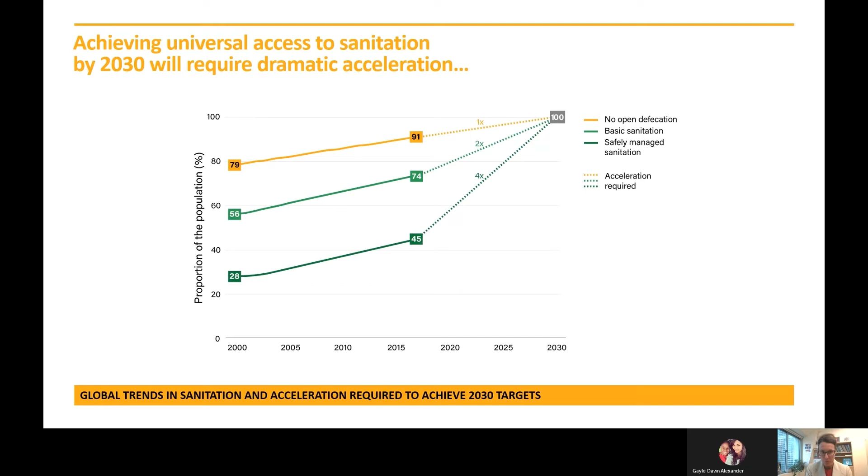Achieving universal access to sanitation by 2030, part of SDG 6 Target 6.2, will require dramatic acceleration in the current rates of progress. Based on current trends, to achieve universal access to at least a basic level of sanitation by 2030, global rates of progress would need to double. Achieving universal access to safely managed sanitation by 2030 would require quadrupling the current global rate of progress.

In response to this global challenge, UNICEF is shifting its sanitation program to support the acceleration required for safely managed sanitation. As we move from working on construction of toilets to working on the full sanitation chain, this has implications not only for the technologies we use, but also the need to establish a supportive sanitation sector enabling environment. This includes policies, institutional and regulatory frameworks, necessary data and evidence, capacity building, financing, and innovation. We need this enabling environment to ensure that services are safe, available, and affordable.

Our ambition is to accelerate global progress on safely managed sanitation services without losing the gains that we've made on ending open defecation.

The 5 key accelerators identified under the United Nations SDG 6 Global Acceleration Framework are improvements in governance, financing, capacity development, data and information, and innovation. These 5 key accelerators can be a pathway towards countries' achievement of safe sanitation for all, with the coordinated support of the multilateral UN system, the World Bank, and partners, including the private sector.

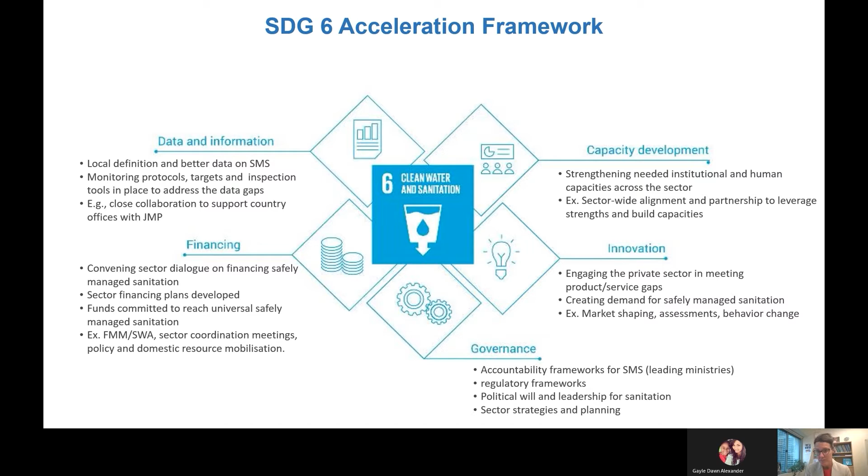Now looking at these accelerators one by one, I'd like to start first with governance. Good governance begins with leadership, effective coordination, and regulation.

Safe sanitation can be delivered effectively through a mix of approaches and systems tailored to the local context. Lastly, governments also have a critical role to play in regulating the sector. Well-balanced regulation is key to ensuring effective risk management while still enabling an innovative sector.

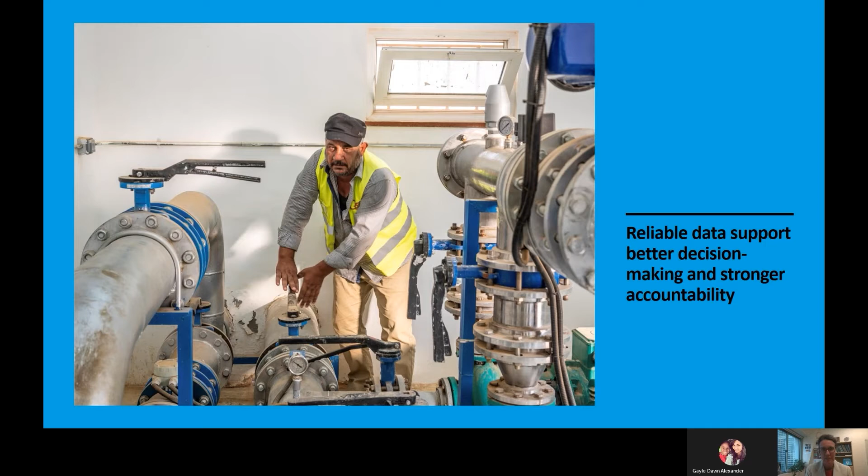Lastly, the final accelerator is to scale up innovative practices and technologies. We've heard and said many times, business as usual is no longer an option if we are going to achieve the transformative progress needed to meet Sustainable Development Goal 6.

Achieving universal access to safe sanitation requires innovative solutions and increased private sector engagement. Innovation can also help us protect the sanitation workforce, giving them safer and more dignified jobs. Innovative technology and approaches can help limit workers' occupational exposure and provide a healthier workplace. Measures such as phasing out manual emptying and replacing it with motorized systems can improve worker health and efficiency. Also, having appropriate personal protective equipment, standard operating procedures, and regular health checks can improve worker health and safety, not only for the workers but also for their families, while supporting continuity of services.

In the trends we can see in the East Asia and Pacific region, increasing urbanization and migration to urban environments call for new ways of meeting the needs of high-density populations, often living in poverty or in informal settlements. To date, most urban sanitation interventions have relied on the expansion of centralized sewer infrastructure that rarely reaches low-income communities and is ill-suited to dense urban slums and unplanned settlements where much of the urbanization takes place. Recognizing the urban sanitation crisis, its disproportionate burden on the urban poor, and the limited progress of prevailing approaches, there is a need for a radical shift in our approach to reaching these communities.

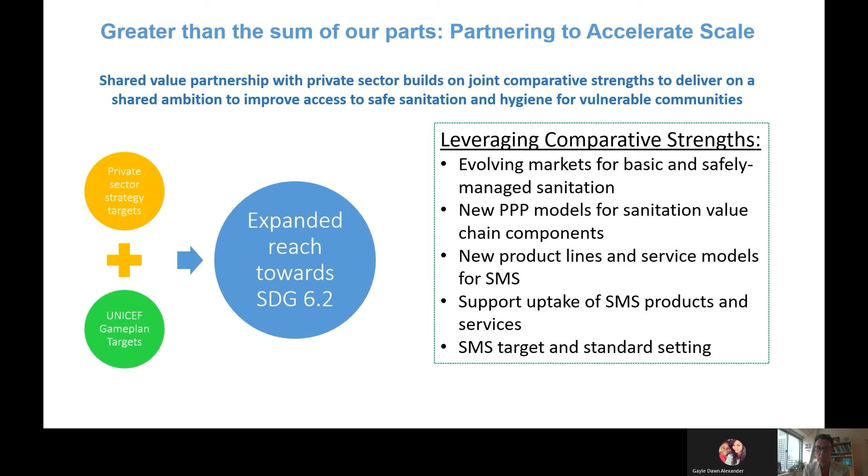We also support the uptake of safely managed sanitation products and services to help develop targets and standard setting, so that we can reach new levels of coverage of these services, meeting international standards.

As part of UNICEF's COVID-19 response, we have increased our engagement with the private sector, not only in the area of sanitation, but also in promoting hand hygiene for all.

Many of you may already be familiar with this initiative, launched together with the World Health Organization at the onset of the pandemic, to tackle the challenge of reaching 3 billion people who don't have access to hand washing at home with water and soap.

This has been an effort of many partners to try to close these gaps, with massive attention given by governments and the whole community to understand the need for enhanced innovations, supply chains, and government leadership. This is part of the front line of pandemic preparedness.

Over the past year, we've seen it move from an emergency response to become a central public policy issue, and it has also elicited new forms of private sector engagement and partnership, for example on platforms like the World Economic Forum's COVID Action Platform. We are seeing greater attention than ever before.

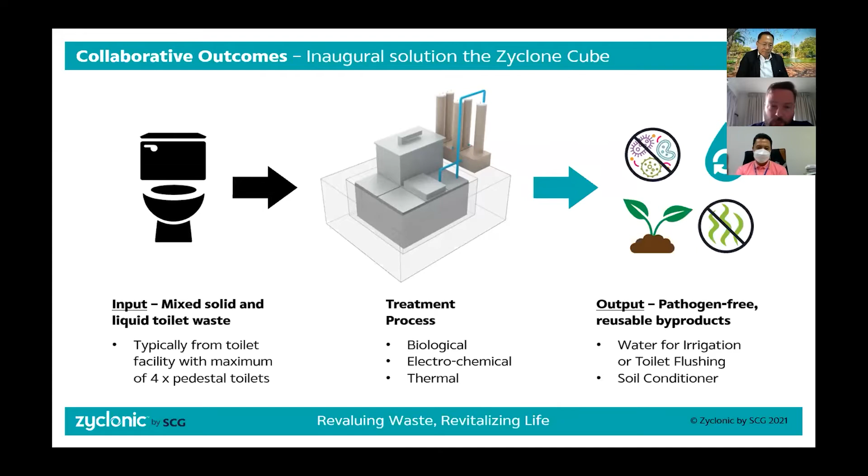So we gave the toilets to the community with the treatment technology, and the community gained also by using those clean byproducts to put it straight onto their land, into their allotments where they can grow fresh vegetables and produce, which they can later on sell or consume themselves.

Also part of that project, again with the Gates Foundation challenge, was to make it off-grid. So we added solar panels to power some of the technology, and also added rain collection roofing to collect water to top up the system with clean water.

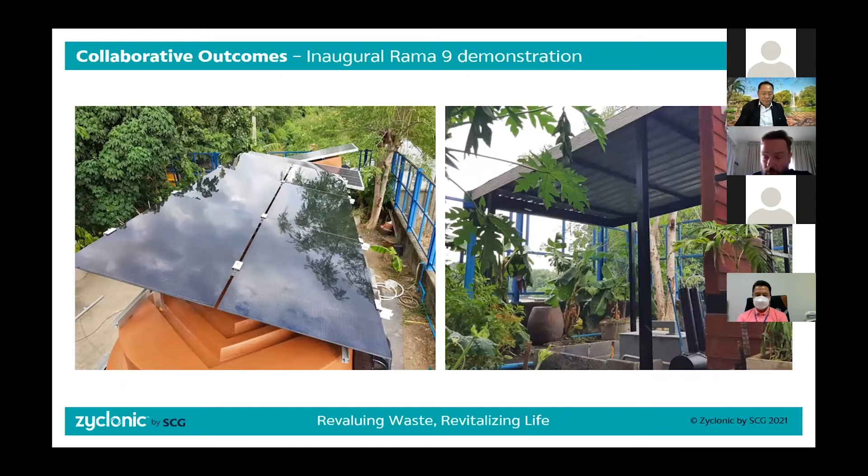Then in 2019, we won a Social Innovation Award for this project, a Thai Social Innovation Award. And also in 2018, SCG's project was one of the ones highlighted by the Gates Foundation at the expo in Beijing in 2018.

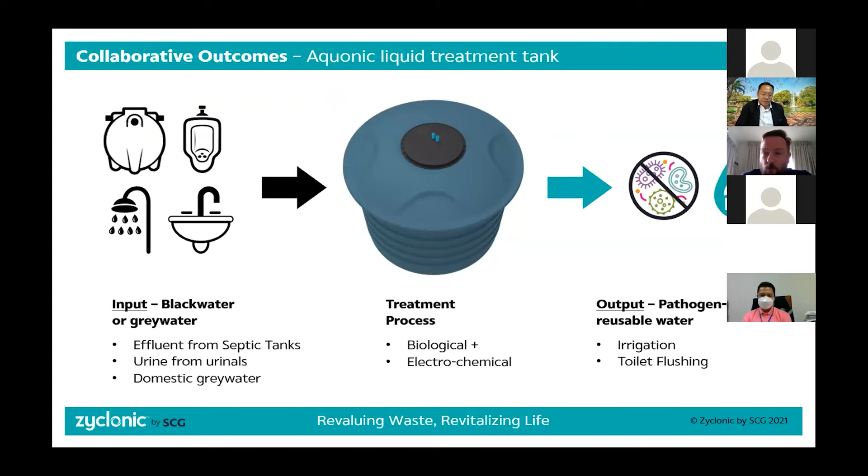Then another real outcome of our collaboration with AIT was our liquid treatment tank. This just treats liquid, no solid treatment. Essentially, we can take black water, grey water, effluent from septic tanks or urine from urinals, treat the effluent in our Aquonic tank, and turn it into clean, pathogen-free water for irrigation and toilet flushing. I'm just going to show you a little video.

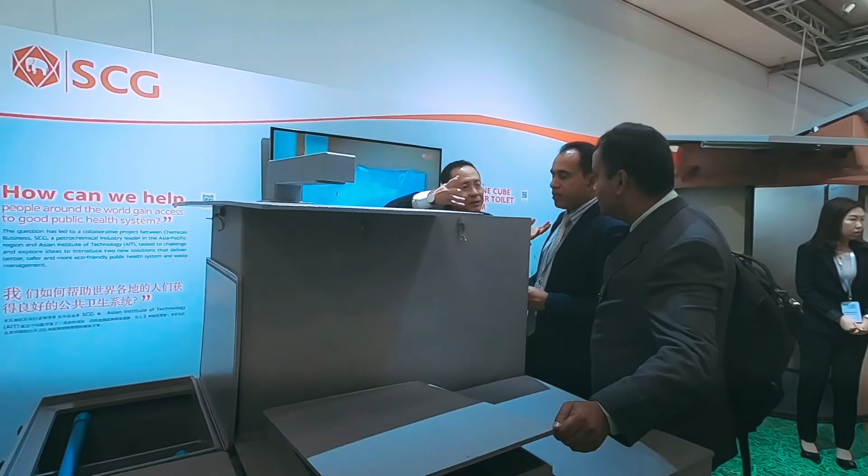There are many places in the world where clean and safe sanitation solutions are still not available, causing human distress and environmental damage. But today, no matter how remote the location, everyone can access better toilets with Zyclonic by SCG Total Sanitation Solutions. Zyclonic by SCG was one of 4 pioneering sanitation enterprises featured at the Beijing Reinvented Toilet Expo in 2018. Zyclonic by SCG currently offers easy-to-install front-end solutions and 2 back-end waste treatment systems which kill pathogens and output harmless, reusable byproducts. The Zyclone Cube is designed to treat both solid and liquid human waste direct from a toilet facility.

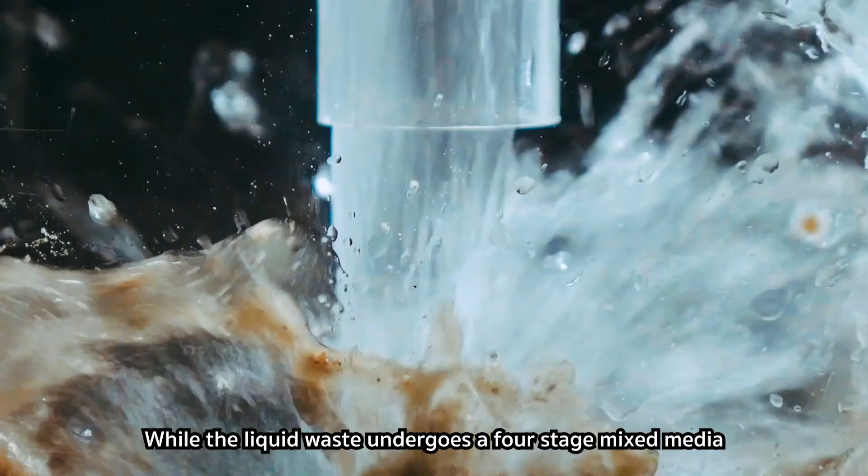After flushing a toilet, human waste will enter the Zyclone Cube via the Zyclone separator, which instantly separates the waste into its solid and liquid components. The solid waste is dried and treated with thermal disinfection at 120 degrees Celsius, transforming it into a pathogen-free soil conditioner, which can be directly used on the land to enrich the growth of local vegetation, while the liquid waste undergoes a 4-stage mixed media biological treatment process and electrochemical disinfection, turning dirty water into pathogen-free reusable water for irrigation or recirculating within the toilet system.

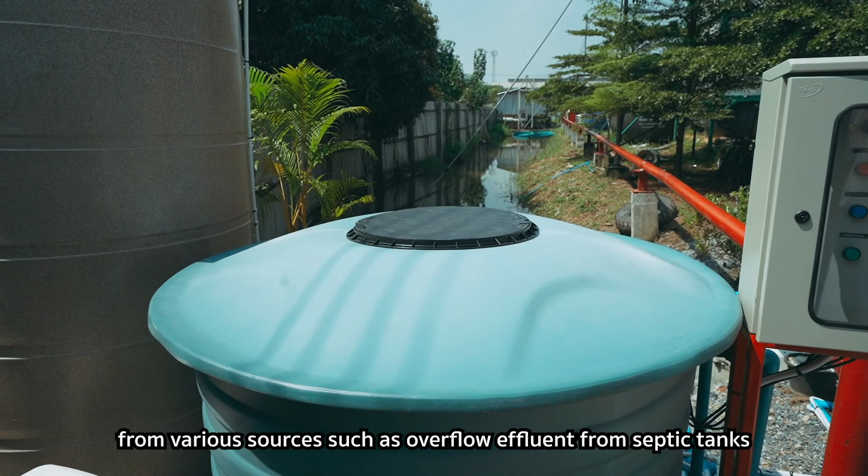Zyclonic by SCG also offers the liquid treatment tank, which recovers and treats grey water from various sources, such as overflow effluent from septic tanks, urine from urinals, or grey water from showers, sinks, or kitchens. The grey water goes through the same biological and electrochemical treatment process as used in the Zyclone Cube, and the treated pathogen-free water can be stored in a water tank to be reused for irrigation or as toilet flushing water. The liquid treatment tank is a compact, localized solution which can be easily retrofitted to existing facilities, producing 100% reusable water. It is an ideal solution for areas prone to drought and water scarcity.

Zyclonic by SCG is one of the sustainable waste solutions offered by chemicals business SCG to provide a better environment and well-being for everyone.

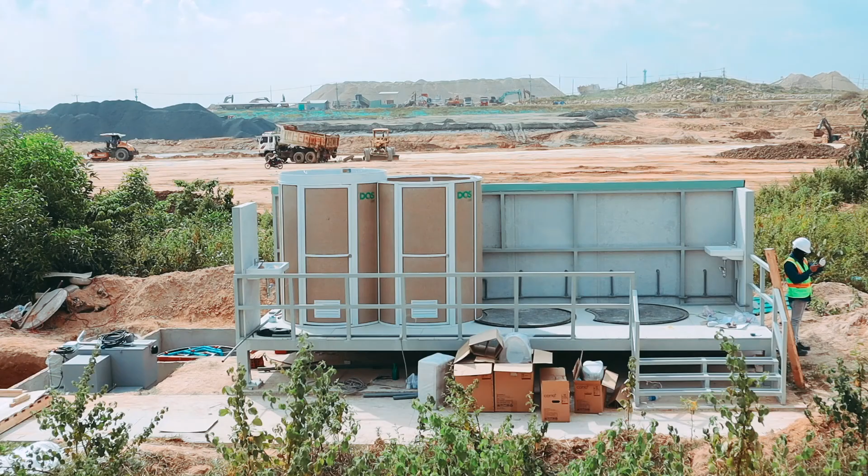Okay, I hope everyone heard that okay. So I'm going to talk a little bit deeper into some of the technology that you've just seen. Essentially we have 4 technologies that are independent.

So we have the waste separation, we have the liquid treatment, the solid treatment, and the odor elimination. But we can combine those together in various different formats to basically create solutions for very different scenarios.

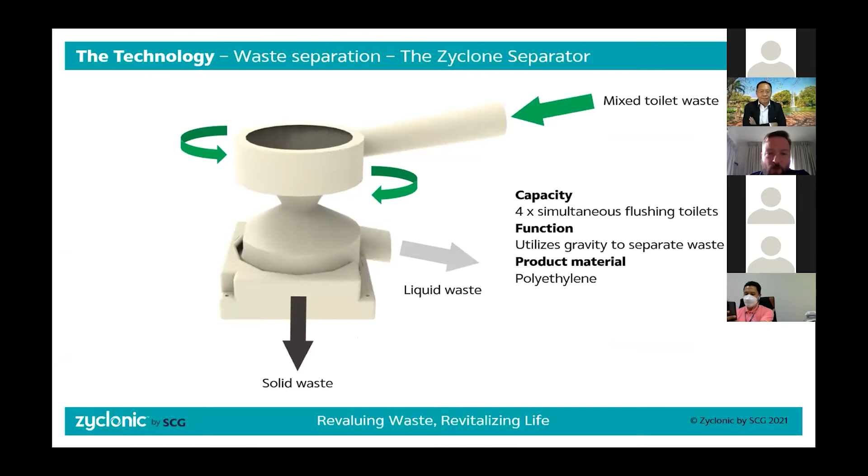So I'll talk about the waste separation, what we call the Zyclone separator. This is a device that doesn't use any motors, electrical supply or anything. It just relies on gravity to separate the liquid and the solid. So the solid drops down the bottom while the liquid sticks to the conical shape of the device.

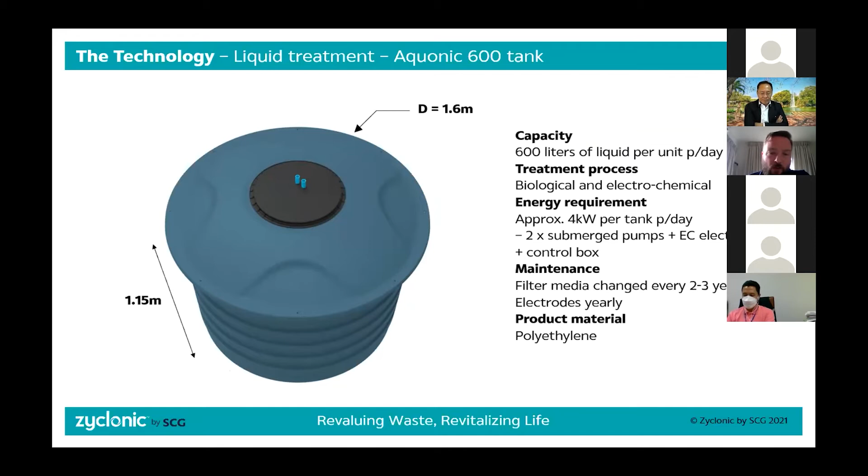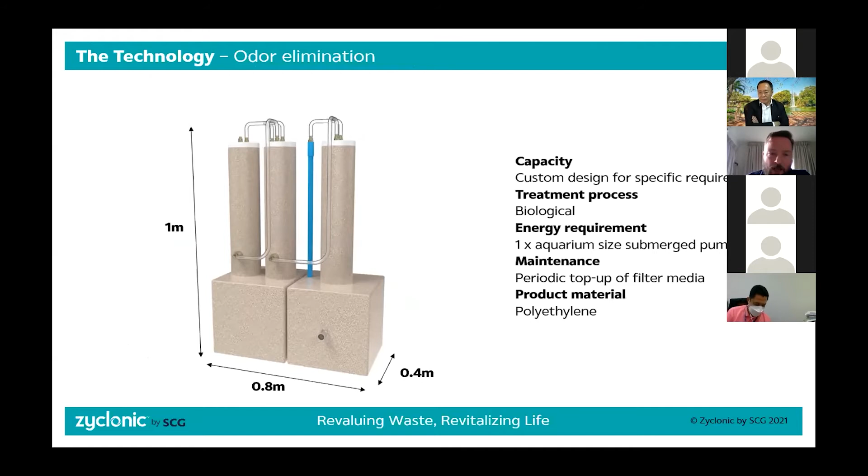And then we have our odor elimination device, which we call our bioscrubber. There's no chemicals used in this device, and it only has a small fish tank type pump inside, and essentially it's used to get rid of any smells generated from treating your solid waste. So any volatile organic compounds or odors pass through the towers, and inside the towers there's a biofilm which essentially eats and removes the smell from the vapor.

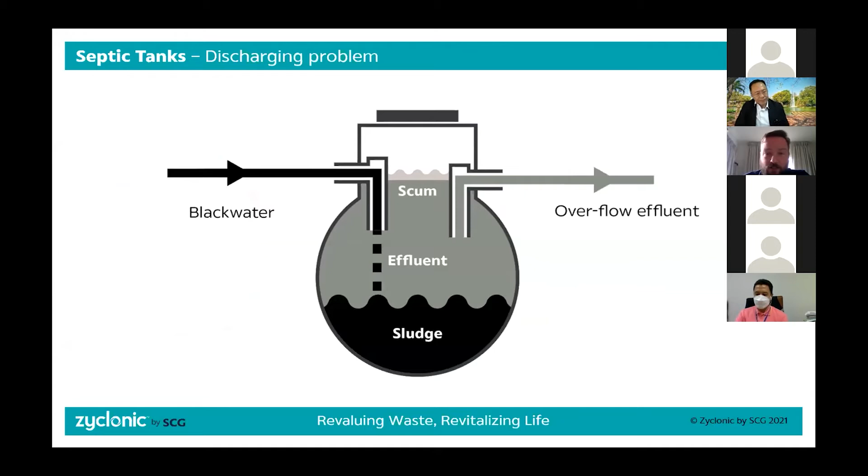So when we're implementing our liquid waste treatment technology, as discussed, septic tanks are widely used in Thailand because they are cheap to manufacture and easy to install. But a problem is that your overflow effluent, when they fill up, this can be released without treatment, so it's still dirty. This is obviously not great for the environment, for canals and waterways, because your dirty effluent is going directly to them, and it's not great for human health either, because this is dirty water still.

So what we do is we essentially tap off your overflow effluent and put it in the Aquonic tank. So we retrofit it, tap that overflow effluent, clean it and treat it so that you can then put it into a water storage tank and reuse it for flushing your toilet or irrigating your garden.

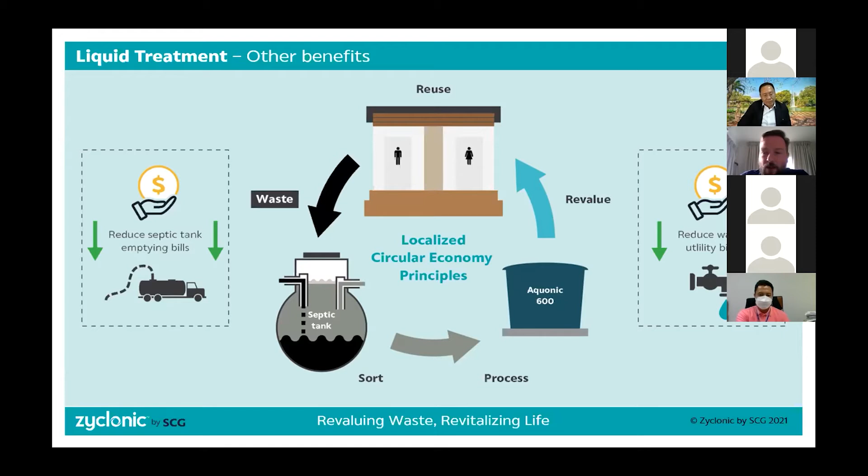So the real benefit of this is it's like a localized circular economy way of thinking. We have waste, but we are then sorting it, processing it, revaluing it, and reusing it. And by reusing your water, you're reducing your septic tank bills because you're not going to need to empty it so much, and also reducing your utility bills.

Then when we're implementing the full system, the solid and the liquid, it's a bit more complex. As I mentioned, the Zyclone separator relies on gravity to separate the solid and liquid. Therefore, the outflow from your toilets needs to be at a higher level than your Zyclone separator. So when you flush your toilet, your mixed waste goes to the separator, the liquid goes to the Aquonic tank for treatment, and the solid goes to the screw heater for treatment.

Your bioscrubber removes the odors, and then you're generating your soil conditioner, which can be put onto the land, and your pathogen-free reusable water.

As I said, this is a compact on-site solution. It's not for large scale, so it's ideal for a small community restroom, a single household, or a small restaurant or industrial facility.

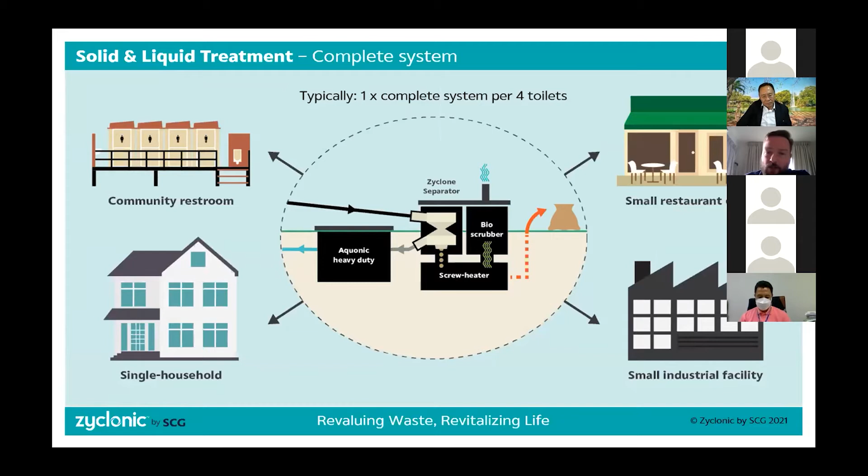Again, similar, it's a very localized circular economy way of thinking of reusing and turning your waste into new value. And then with the added value of your soil conditioner, the solid part, you can put that on the land to help grow vegetation, which you can gain an income from.

And then what we've really found from our implementations is that a hybrid system is another alternative. This is bringing together the septic tank and our technology for treatment together. So at the first stage, you have your septic tank. The second stage is to add your liquid treatment tank to treat just the liquid. And then at the third stage, to add your solid treatment.

And as you can see on the left side, there is a three-way valve, so you can direct your waste either to the Zyclone separator or to the septic tank. What's great about this is that it allows gradual engagement with new technologies for people and communities to understand how they work.

And really the benefit of the septic tank is that it adds a fail-safe component. So your toilets will always be functioning and always work, whether there is maintenance being made on the technology or there's some kind of technical problem. So your systems can run, your toilets can run all the time.

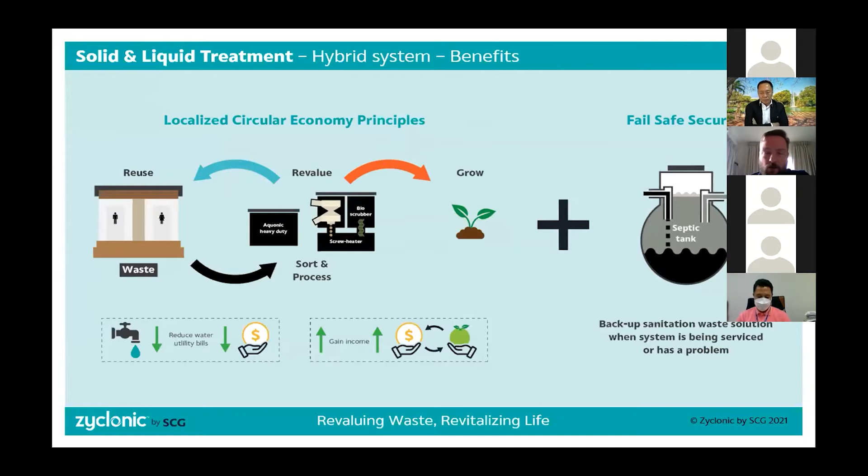So within Thailand, we have tested around 7 locations now with a variety of different setups and solutions, combining different technologies together.

As you can see, they vary in the size of the demonstration sites, the type of public and type of users, and the differences of effluent and the load of that effluent. Please join us tomorrow for our virtual field trip, and I will go through each of these different demonstration sites and explain a little bit more about how they've been set up and the kind of performance they have. So thank you very much.

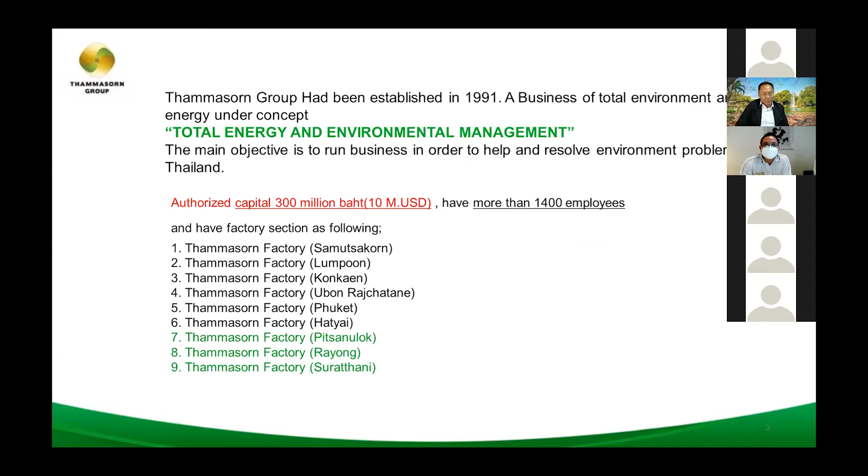Thammasorn Group, or DOS, right now has 6 factories in operation in Thailand and 1 in Indonesia. These are our factories, where we mainly produce the DOS wastewater treatment complex systems, from small scale to large scale.

I'll go fast and focus on wastewater and water treatment business. This is DOS, which is mainly our focus as an environmental company. These are the family of products that we produce in all our factories - we can produce many kinds of container water tanks and also wastewater treatment systems. We also joined with SCG to produce the body of the Zyclonic toilet technology.

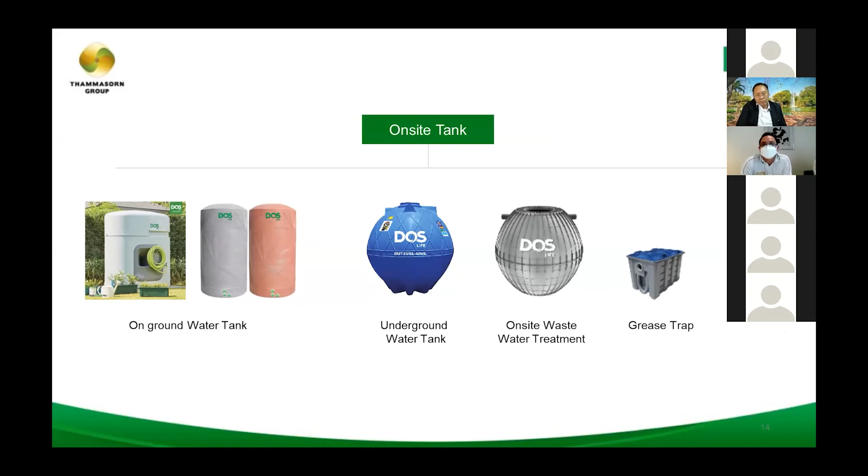These are some septic tanks and water containers, and also the quick tap system that we use. We are also mega dealers of many water-related products, like water pumps, water filtration systems, water heaters, and these are the larger scale tanks, which can be produced from many materials in our factories - polyethylene, polymers, and FRP. The tanks can be produced in many scales, from small to large.

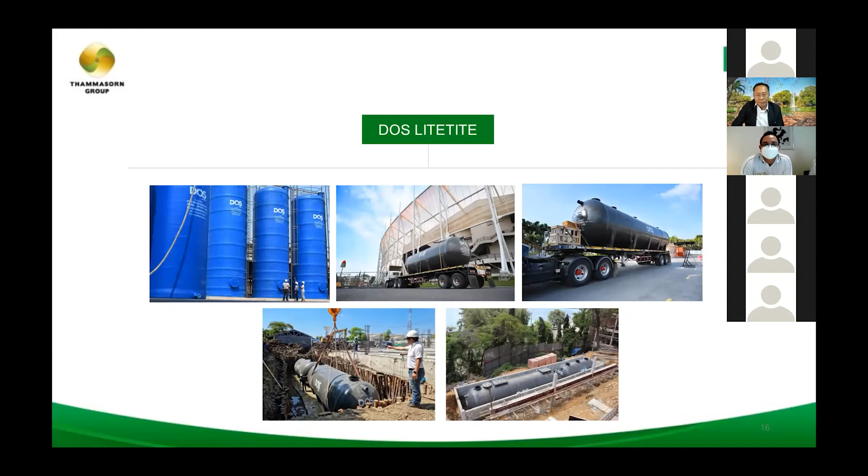We will go into more details and show you some installation samples tomorrow.

So we also do electrocoagulation to separate grease and oil from wastewater. This is mainly useful in restaurants and food factories. And these are wastewater treatments that we have done in the past.

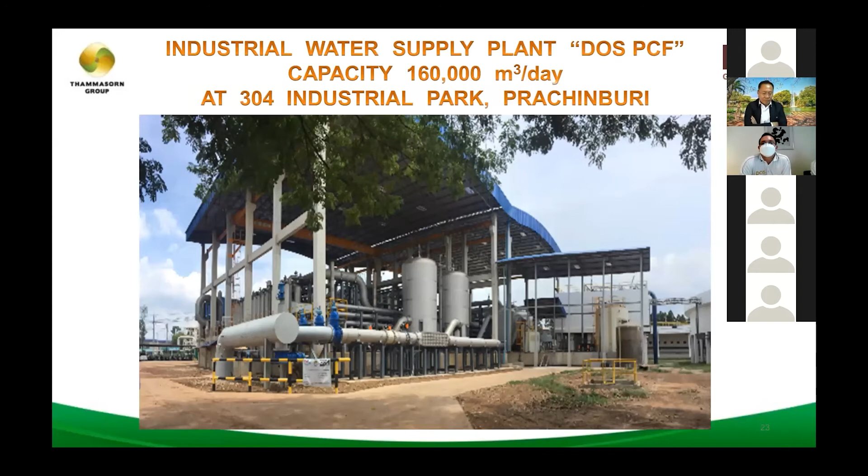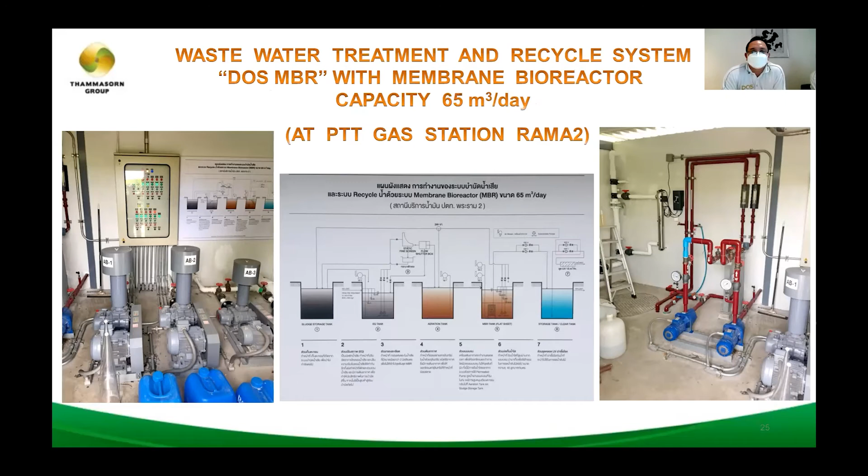And these are the wastewater recycling MBR system that we did jointly with PTT gas station on Rama 2 Road. This wastewater is converted into clear water to use for gardening and toilet water again at this gas station. This is also the MBR wastewater recycling system.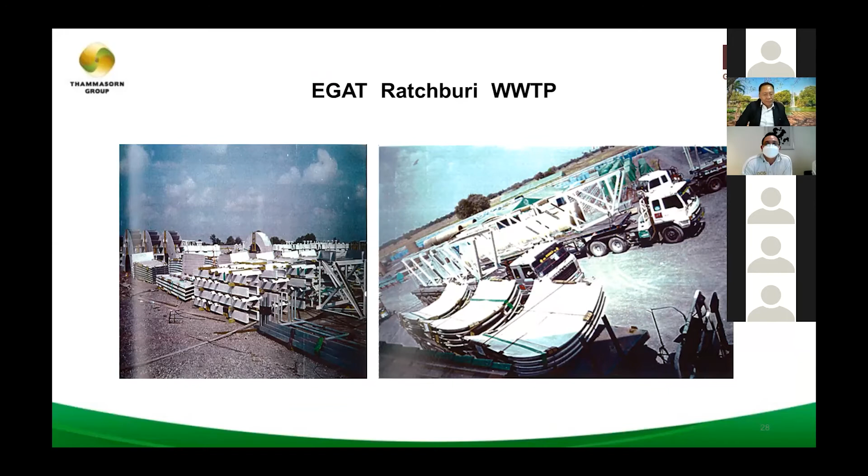And these are some steel fabrication projects that we have done with EGAT. This is the last clarifier for water treatment. It's an advanced project at 304 Industrial Park where we built this big clarifier for water treatment.

And there's some advanced wastewater treatment. So Thai Nam Tip, Coca-Cola factories - we use water from the canal to produce Coca-Cola in these factories.

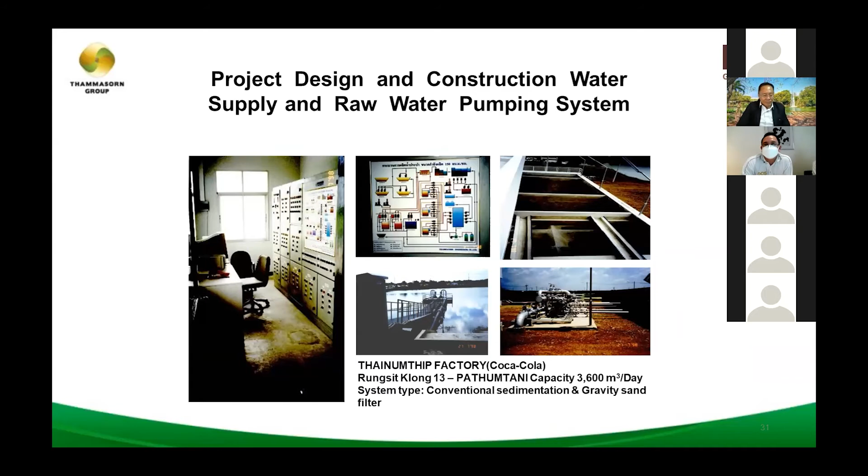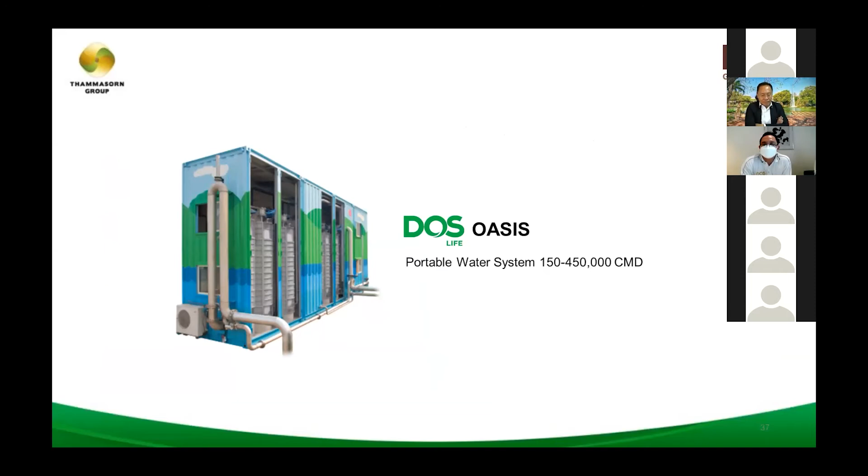So, moving on - these are the potable water treatment system that we call DOS Oasis. We joined this technology with a Korean company.

Now this system has been installed and in operation for more than 5 years at 304 Industrial Park at the AA factory.

This DOS technology we call DOS PCF. The DOS PCF is very advanced. With 160,000 cubic meters per day capacity, it requires only 30% of the space of the conventional system and requires about 50% of the operation cost only.

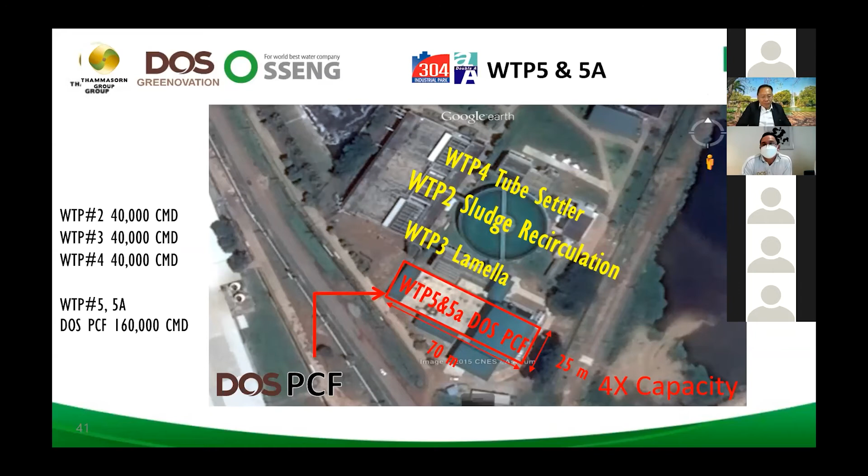And this DOS Oasis, which is the small scale version of DOS PCF, is equipped in one container and can be transported on-site anywhere you want to treat potable water.

Apart from wastewater and water treatment, DOS also does solid waste management to handle some solid waste, municipal solid waste, and also hazardous waste.

This is some waste sorting plant in Phuket where we do all the sorting plant inside, also the sorting conveyor line. And these are the solid waste treatment plant in Chiang Mai.

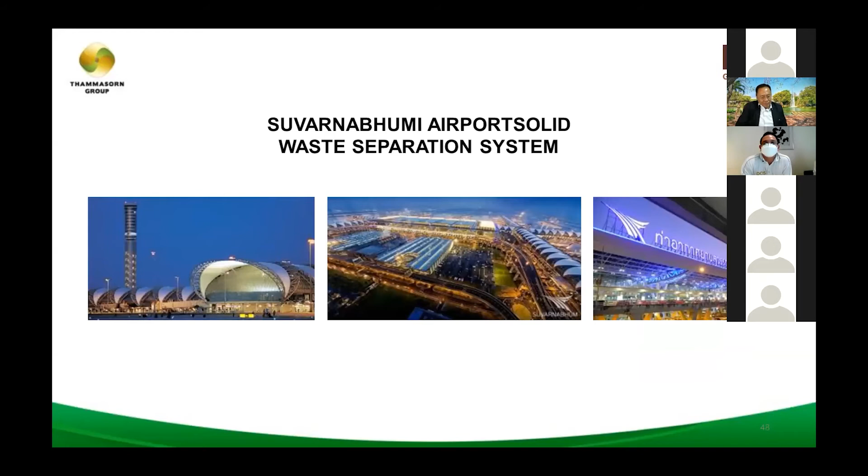We also do the solid waste sorting plant in Suvarnabhumi Airport. It's in operation right now.

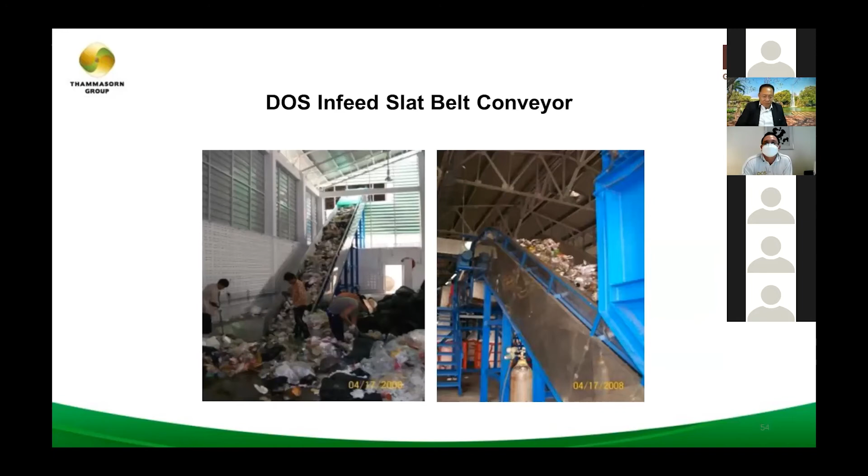All the waste at the end can become compost. It's a baling machine - we also produce this baling machine and also this kind of conveyor system.

These are the recycle system of the solid waste, making it into fuel. We also do incinerators for hospital waste.

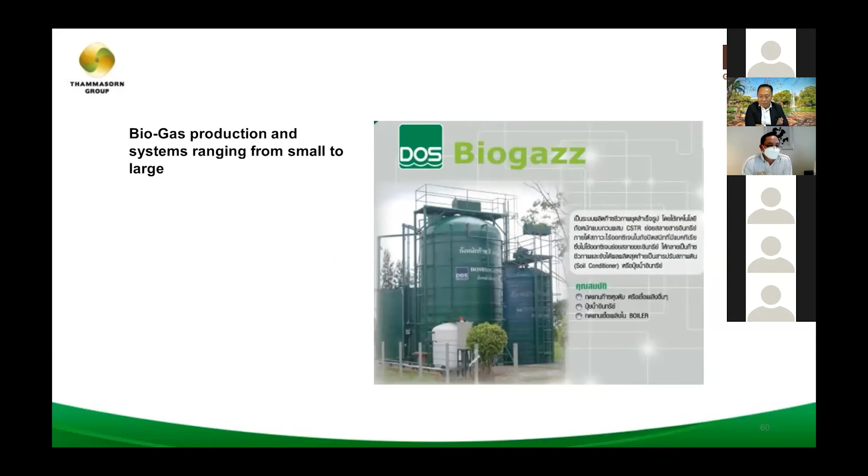Also, we have done many biogas systems that use wastewater from the kitchen of a factory and canteen, coming into our process and making methane gas to reuse in the kitchen of that factory again. Many references for the biogas system.

And this is our latest innovation technology, which we would like to launch probably next year. It's DOS EcoGas, one of the technologies for LPG and natural gas saving. We use a molecular enhancement system, and this technology will save the consumption of LPG gas and natural gas by about 5 to 20%.

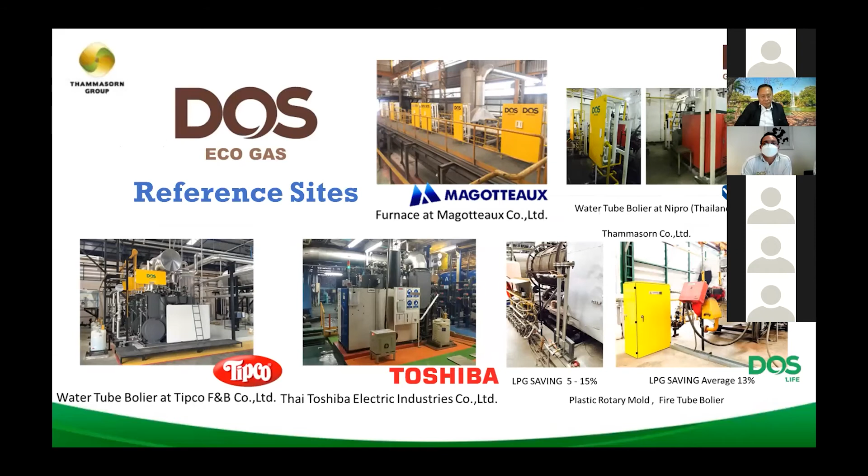This is some reference where we already installed this LPG gas saving system. And we also do hazardous waste transportation with our sister company named Siam Waste Management Company Limited.

So now we come to the community municipal water treatment. I'd like to show you some video to demonstrate the concept, because we have an issue of what to do with the wastewater coming from each household. We have two ideas: to treat it on site, or to use a central tank. So we'd like to show you some concept.

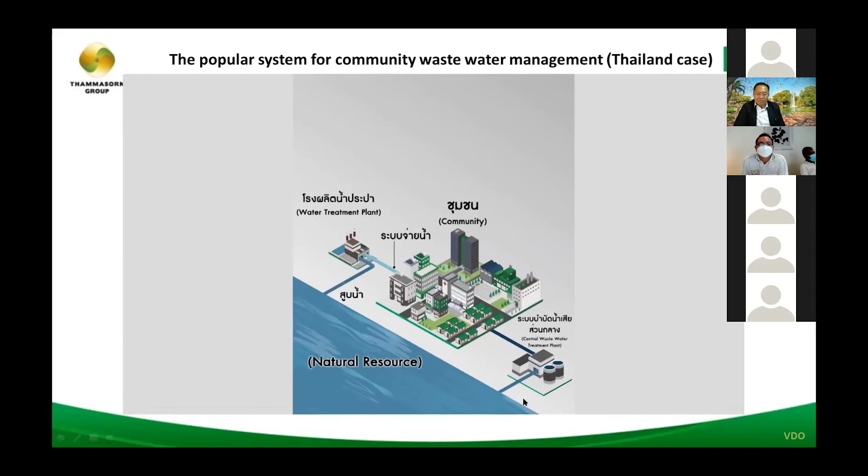So is that all your presentation? Yes, this is all for today. Okay, thank you very much, Thanawat, the DOS team, for bringing us this very interesting technology. It's not just a standalone technology for water treatment, wastewater treatment, or solid waste management, but you try to integrate these technologies for use within the house or within the community.

Is that also interesting? I think there are two questions addressing the compost and solid waste management. The first question asks how is the composting quality that you have done in your projects? In that issue, actually, composting has been used effectively, especially at our Chiang Mai plant, where it has been used widely in many orange farms. So it is very effectively used.

It depends on the source of the solid waste. One is actually pure municipality waste, coming from markets, fruit markets, and other sources. So the ending product is very good quality. So the compost is from municipal solid waste, right? Yes, only the composting is made from municipal solid waste. Yeah, it's not mixed with fecal sludge.

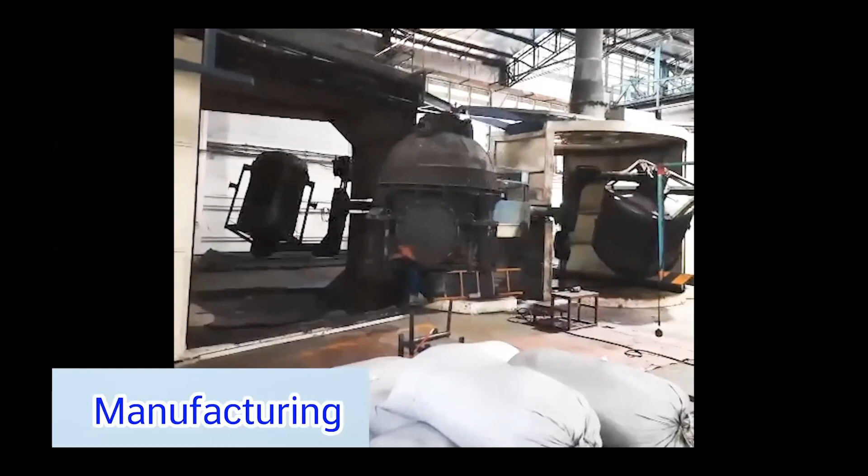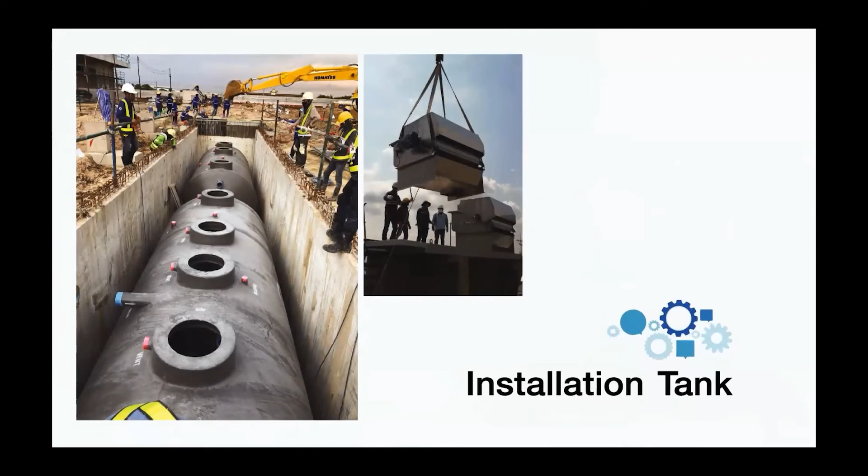Aqua Nishihara also offers a comprehensive range of bespoke services and products to cover all wastewater circumstances. All Aqua products are cost-effective and environmentally sensitive. Today, our company has developed a vast range of products to satisfy the needs of all sanitation requirements. The products can be classified into 4 groups.

1. Residential houses and small buildings. 2. Central treatment plants for projects that have undergone initial treatment. 3. Large building blocks. And 4. Water reuse group.

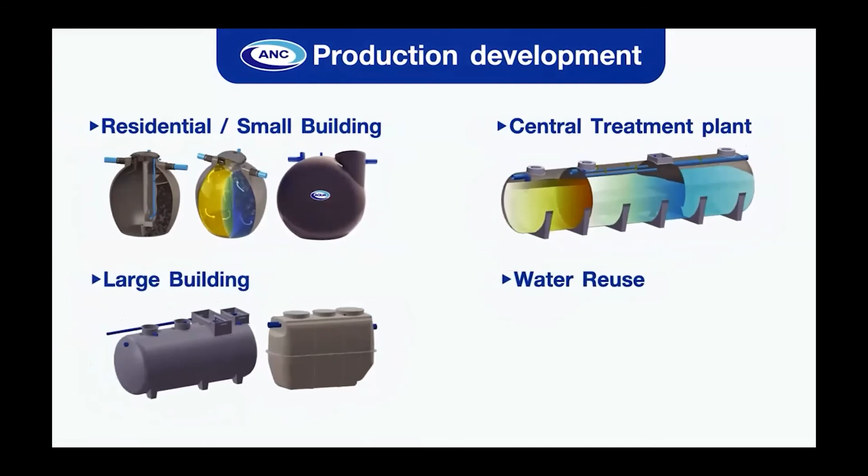Number 1, residential houses and small buildings. This tank is designed and developed for use in single-family homes of 1 to 10 people as a septic anaerobic system.

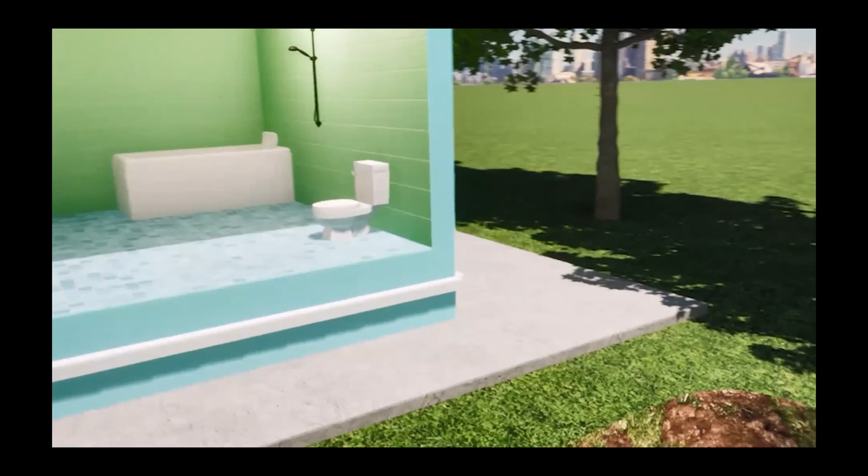This is a simple system that does not require energy for the pre-treatment system before being released to the public sewer and receiving further treatment at the community's central wastewater treatment plant.

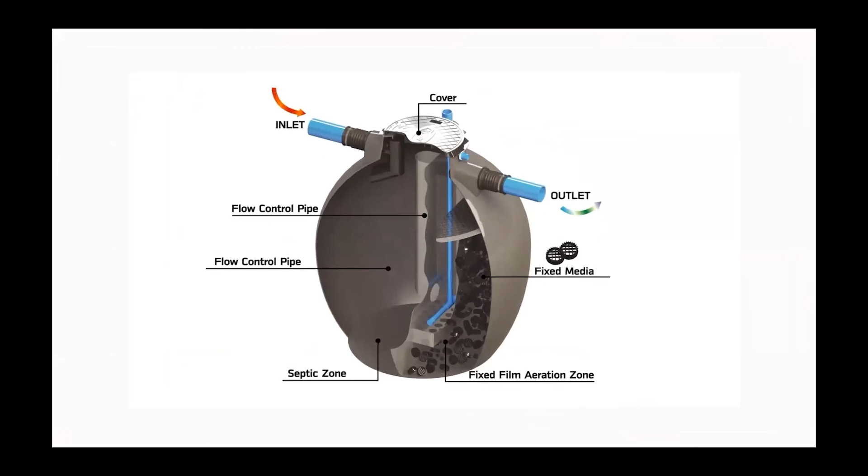This product is an aerobic system designed for use in areas requiring direct water discharge to natural water reservoirs. This system is accessible to general users and can be used to mitigate environmental degradation. This product requires less space for installation and is also a septic anaerobic system.

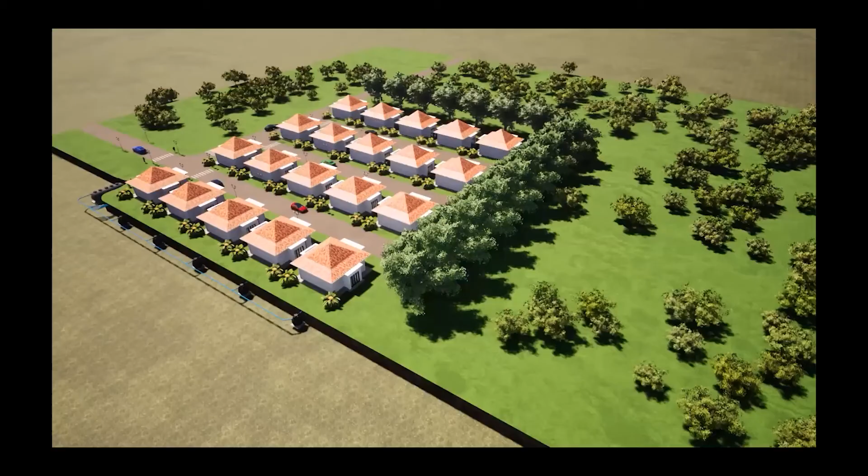Number 2, projects with collective treatment ponds that have undergone pre-treatment. This wastewater treatment system is designed and developed for use as a central treatment system of housing estates. Prior to this system, wastewater must be treated from the septic anaerobic system.

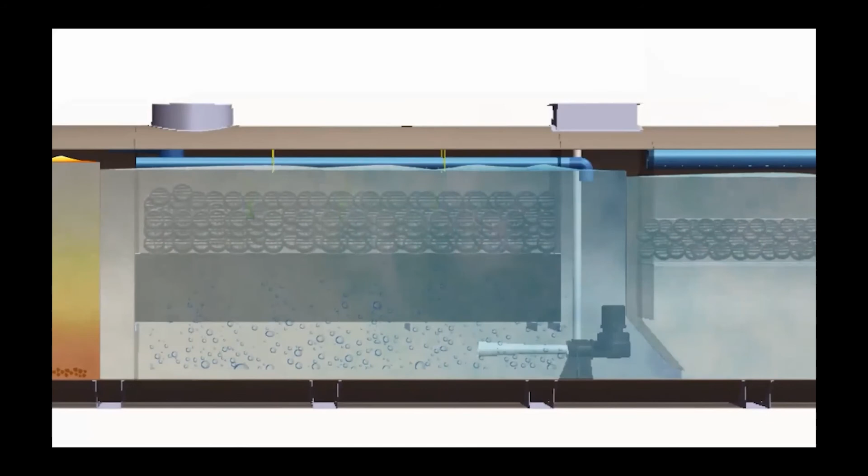This system is an aerobic biofilm system using fixed media and moving media inside the tank, designed based on hydrodynamic principles to increase efficiency with circulation and reduce dead zones, designed for easy use and maintenance.

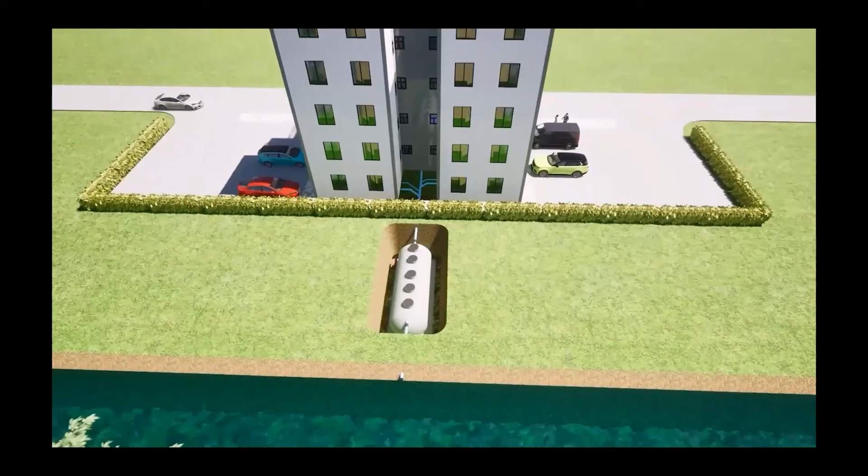Number 3, large buildings. This product is designed and developed for use with residential buildings, government agencies, condominiums, and educational institutions. This type of tank has advanced treatment efficiency to effectively reduce BOD and nitrogen in wastewater.

It is a high-performance system using anaerobic and aerobic biofilm, which occupies a small footprint. The tank has a flow stabilization system to act as a buffer volume to support flow variations during the peak of the day.

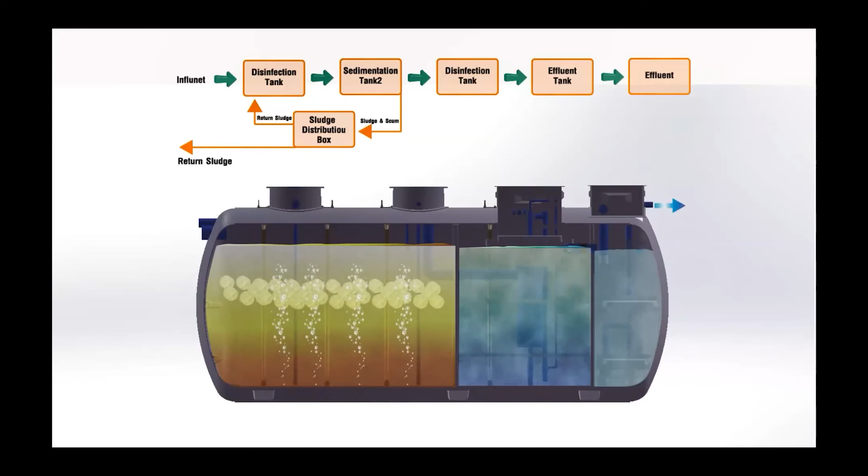Peak flow occurs twice a day, once in the morning and once in the evening, according to water consumption. This system will stabilize the treatment efficiency. Extensive testing is always carried out to ensure absolute confidence in the strength and durability of the product.

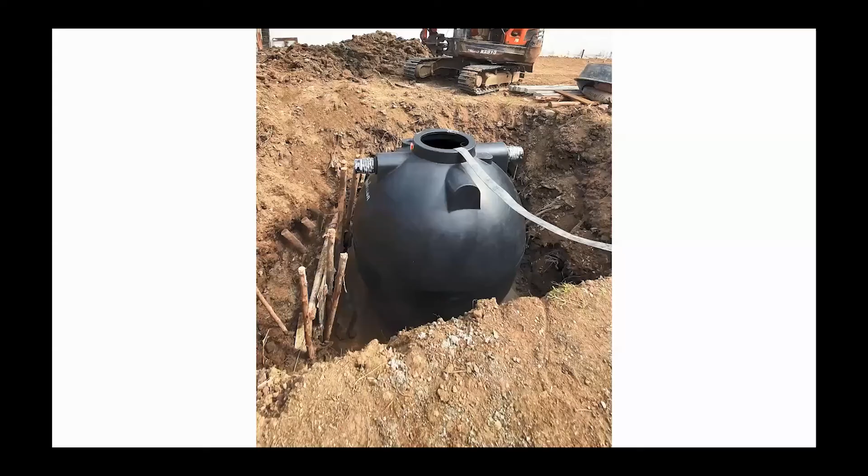Number 4, water reuse. This involves bringing the treated wastewater from the finished wastewater treatment tank to continued treatment in order to get the right properties for agricultural usage.

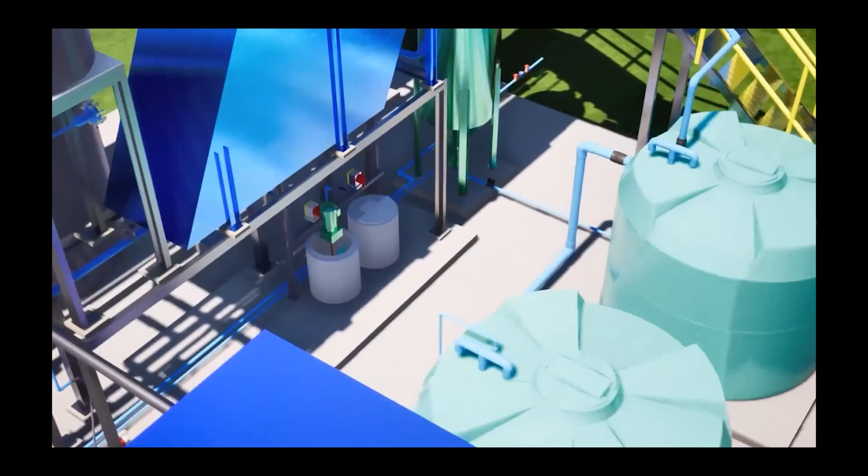The water reuse system is an MBBR continuous sand filter system which can reduce the amount of nitrogen and phosphorus from the wastewater, making the effluent accessible to further usage.

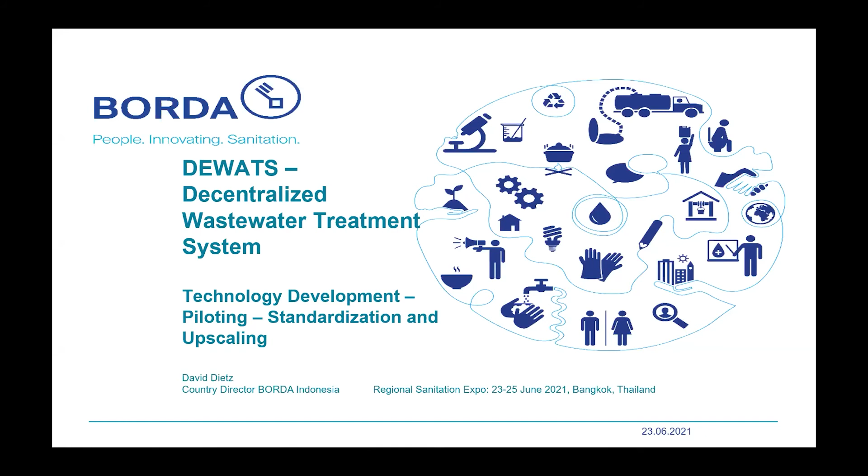We also work in fields of solid waste management, fecal sludge management, combined partly with water supply. Today's presentation is mainly on how the development of the technology happened, how we went through piloting phases, first application, mainstreaming and upscaling, and what were the needs for standardization and benchmarking of technology, from the perspective of development cooperation working in low and middle income countries.

We work globally, particularly in Southern and Eastern Africa, and in Latin America. Our headquarters is in Bremen, Germany. We have country offices and a regional office in Amman, Jordan, in Afghanistan, and in northern Iraq as well. Our main focus today is Southeast Asia, but we also work quite intensively in India, and with smaller projects in Nepal and Bhutan.

The strategic approach for today's presentation looks at decentralized wastewater treatment or sanitation technology. We went through a piloting, R&D and development phase in the beginning, looking at locally implementable, locally operational systems and approaches that can be done with local resources, yet meet national discharge standards and requirements for safe discharge or reuse of wastewater, through a few years of piloting in the early 2000s.

Our work doesn't only focus on technology implementation or development, but also a lot on capacity development—building capacity in the sector across various countries and levels: at the ministry and national level regarding legal frameworks, for the private sector and construction companies, for local civil society organizations we partner with, and with municipal or other stakeholders who are our clients, like school management or hospital leaders.

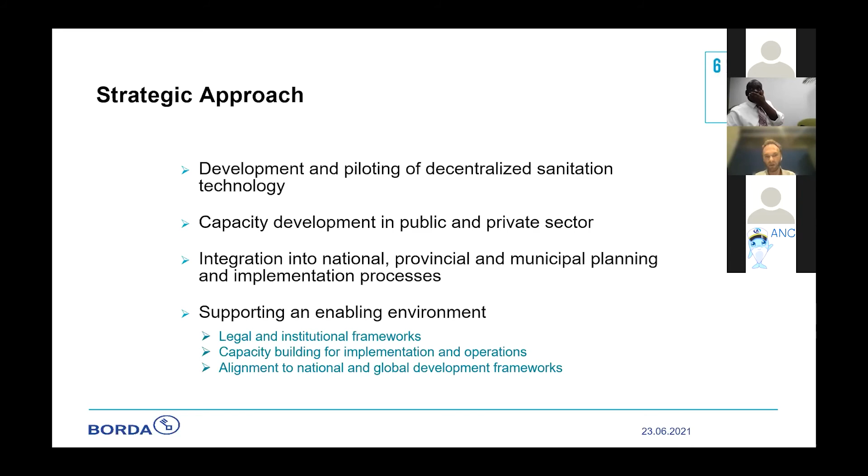So very briefly, the technology consists of 3 main modules. We have a settler, similar to a septic tank, where we have the main separation of solids and liquid phases. We have an anaerobic baffled reactor and an anaerobic filter as part of the second phase, where we have the highest amount of COD, BOD removals. We have a planted gravel filter, mainly the aerobic phase, where we introduce oxygen to the treatment process through the roots of plants, and have significant nutrient removal in this phase. Optionally, depending on local requirements, there can be polishing ponds, facultative ponds, or other tertiary treatment options available.

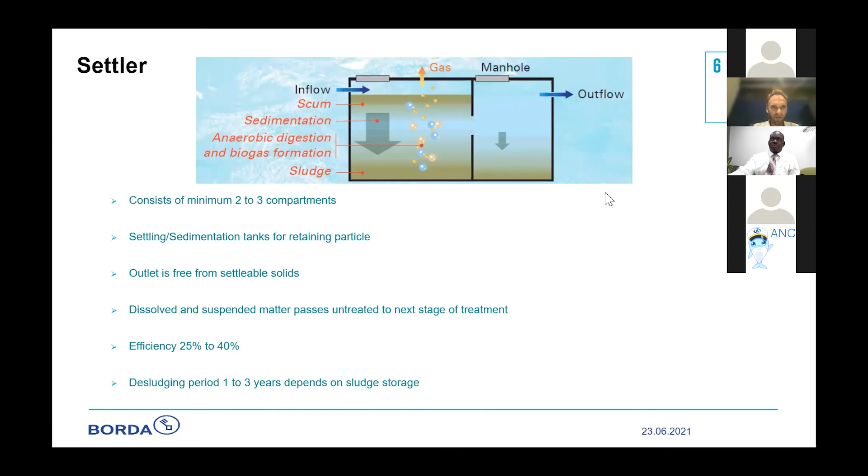The next phase, the anaerobic baffled reactor, is the middle part, where the water flow goes through a line of chambers. The number of chambers depends on the quantity and quality of inflow, which influences the design of the systems. It's still an anaerobic phase, so no oxygen involved. We have a little bit of sludge at the bottom that holds certain bacteria, further decreasing the organic load of the wastewater. We have a treatment efficiency in this phase of 75 to 85%, after the first 2 phases. Desludging is rarely needed in this phase because the majority of solids settle in the first chamber in the settler.

The anaerobic filter usually uses volcanic rocks, volcanic stones, or certain plastic elements. There's always a suitable filter material available in the local markets in every country where we've worked so far. The water passes through there, and this filter is used in particular to build up more bacteria that digests the organic matter and organic load of the wastewater. We usually reach, after these 2 phases, an efficiency of 90% COD removal, or 75 to 90%. Desludging is used even less here.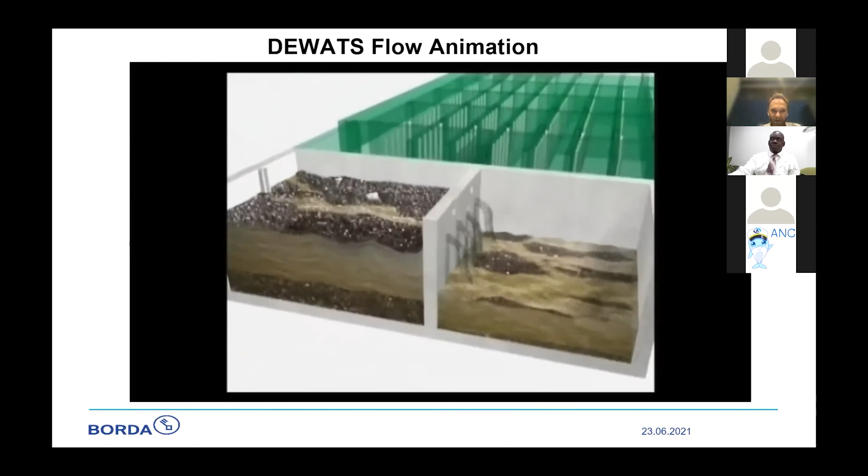Here we see the settler, how it builds up and flows over. The majority of solids stay already in the first two chambers, so this is a two-chamber settler basically. It flows further. This is a very large design obviously. I'll come later to the quantities that are feasible with this technology in terms of wastewater.

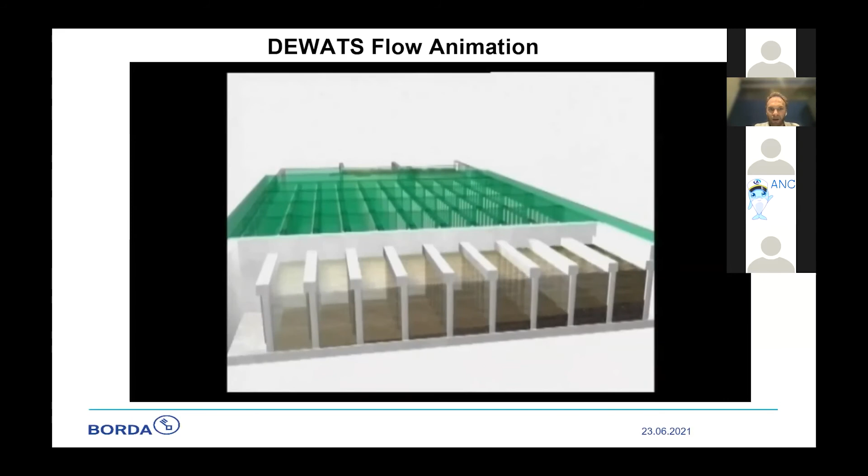Here we have the anaerobic baffle reactor, where we have the first formation of bacteria that really works on the wastewater. The sludge or solids on the bottom get less and less, but it's not the target to have no solids on the bottom, because that's where most of the bacteria sit and thrive. It's a biological treatment system that needs this bacteria to digest the organic matter in the wastewater.

Here we see like a 12-chamber filter, though usually not as big in most of my cases, an anaerobic filter. Again we have this vertical flow of water going through the filter material and through the bacteria, which further reduce and remove COD and BOD, reducing the organic load of the wastewater.

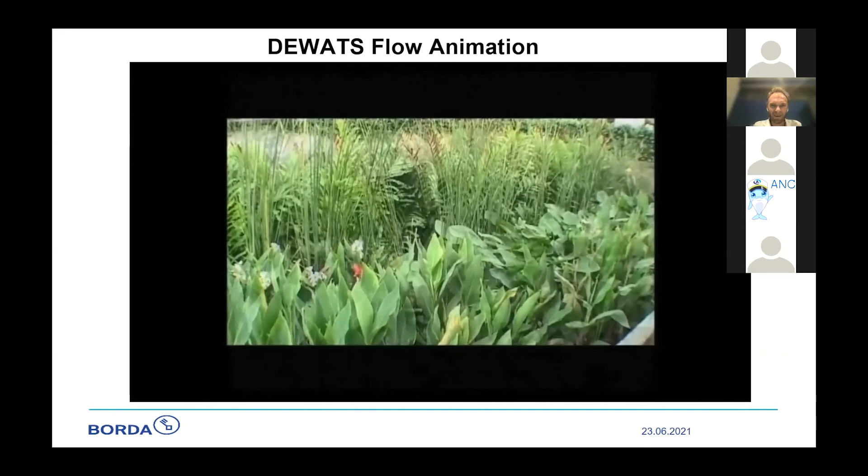And lastly, oh, now it shows. It's not the most modern video, I must admit. Here we see an actual picture from the planted gravel filter. It's very nicely integrated into places like schoolyards or hospital yards, wherever it's applicable. So we have this horizontal flow here instead of vertical flow.

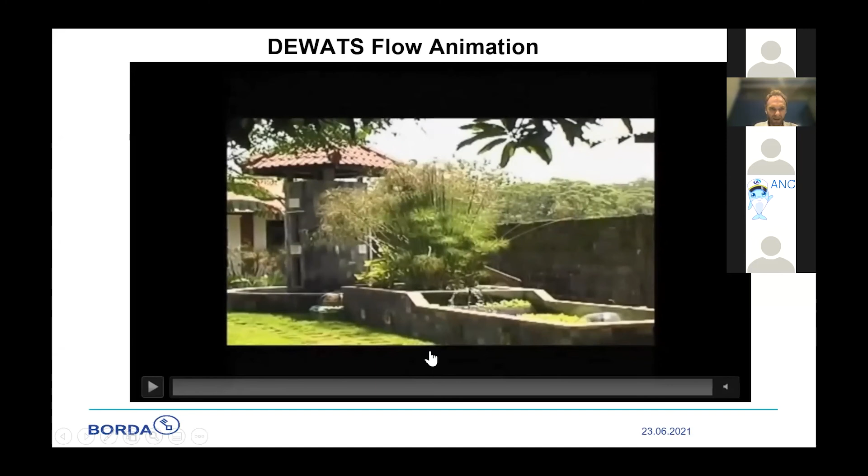We have the oxygen going in from the top through the roots, and coming out in the end. This is the backyard at our office in Indonesia, where it's a little bit of an adapted version of the system. I think we can go to the next slide. I hope this animation made it a bit clearer how the wastewater flows.

So, very briefly, a few benefits of the system. It really is a decentralized approach, from 1 to 1,000 cubic meters. I'm careful with this 1,000 - I know there are a few systems with several hundred. This is based on the design parameters. When does it make sense to really have a 1,000 cubic meter treatment system? It really depends on the context.

The majority of our systems, I would say, are maybe between 10 to 250 or 270 cubic meters, and this is the most standard way. Reduction of pollution by about 90%. It's not drinking or bathing water - we also don't recommend watering salad or something eaten immediately with this, but it is fine for irrigation, so for root irrigation.

We have comparatively low primary investment costs, and compared to other treatment systems, very low operational and maintenance costs. This modular setting of the design means it's very adjustable to the need, to the quality and quantity of the inflow - what is the customer or user group producing, what kind of wastewater are we dealing with. The design can be adjusted, made more affordable and cheaper, according to the needs and discharge standards. Land requirement is minimal, though that depends if you compare it to centralized systems.

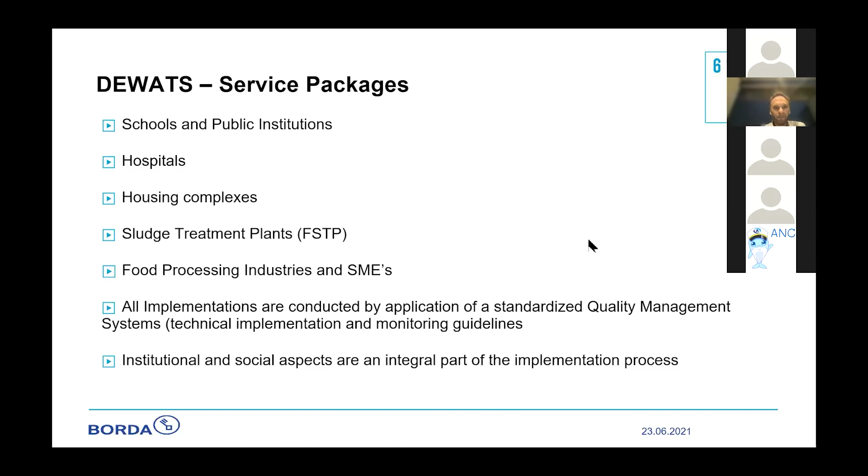Since we have this partnership with AIT, I want to come back in a second to how this came up and how we see a need to really benchmark and test, benchmark and certify standards of product. We talk a lot about products today, and we think about South Asia or Southeast Asia, with various countries, various different preconditions and different government regulations.

This shows a little bit—okay, things went fine for the first 100 implementations, but more and more later we realized, especially when it comes to introducing prefabricated modules that can be produced and replicated by various companies around the region, it's important to say: how can we label, how can we benchmark the quality, the performance of the product, the performance of the treatment process and the quality of the product, and how can we test and certify that in order to reach a reliable standard, and not create a new problem.

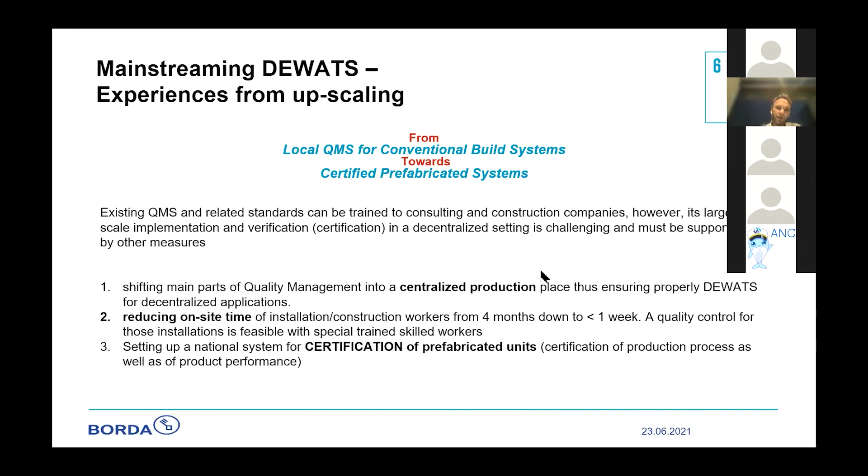Next slide, please. Where we came to this cooperation with the Asian Institute of Technology, developing the AIT test laboratory for decentralized wastewater treatment systems—not only for our system. It's about developing a testing system first, or a testing approach, that looks at material behavior and performance consistency, that can give a declaration of performance, so it can actually prove and confirm certain treatment performance and efficiencies.

And this is installed now at the AIT, and there will be a session tomorrow also with AIT, that looks really at their laboratory, but also at this testing facility. And we see this as a key element, not yet completely matured possibly, but a key element for the regional sanitation sector in Southeast Asia to come to product certification, product testing, product certification.

And this is definitely not for Thailand only, or Thailand might be also differently advanced already, but for all other countries in Southeast Asia, to say we want to have a benchmark on the products, and we want to really advance the sector of sanitation with promoting and contributing to quality sanitation products as well.

I hope I didn't go too much over time. Thank you very much for your attention. I hope it gave a little bit of an insight and also a bit of inspiration to where the sanitation sector with decentralized technology stands, and what is our experience and our learnings from this.